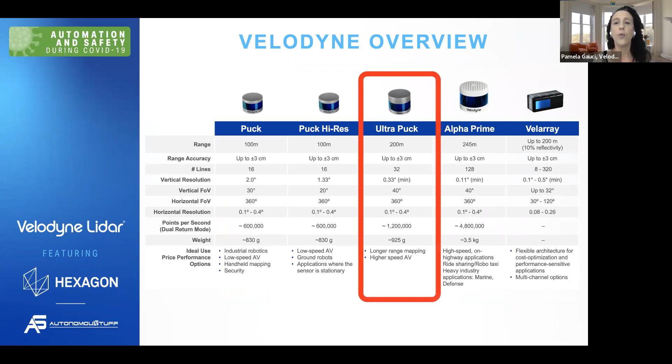Here you see just a few examples of Velodyne Lidar's suite of LiDAR sensors. Our product portfolio provides real-time perception data that enables autonomous driving and advanced safety. Now we're going to focus for a couple of minutes on Velodyne's UltraPuck, one of our surround view sensors designed with the autonomous vehicle in mind. Let's take a closer look at Velodyne's UltraPuck sensor.

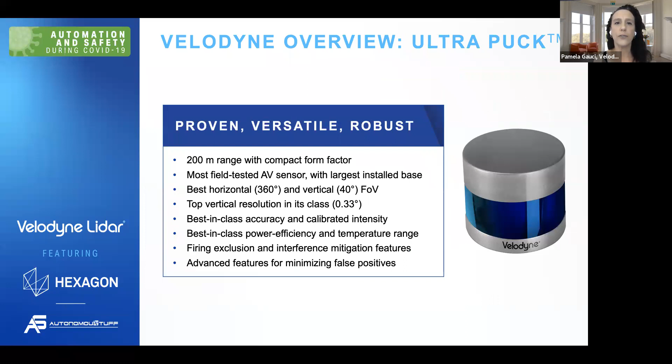The Ultra's 200-meter range and 32 channels provide enhanced resolution to identify objects easily. Velodyne's UltraPuck generates 1.2 million points per second in dual return mode. And since it's built on Velodyne's 558 patent, it provides a full 360-degree environmental view to deliver accurate real-time 3D data. Now let's see what that kind of data looks like.

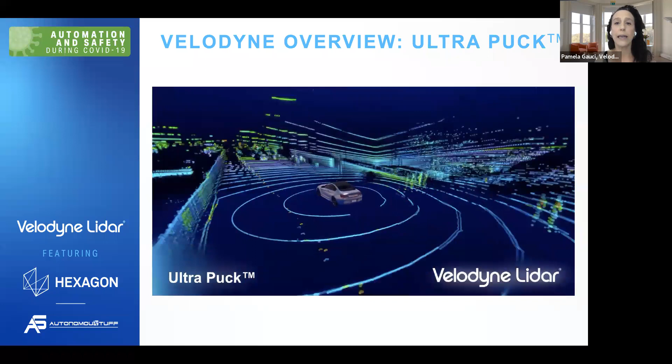In this video clip, you can see the high-density, long-range data captured by Velodyne's UltraPuck on a drive through Nashville, Tennessee. In addition to the features already mentioned, the Ultra offers firing exclusion and interference mitigation features. It also includes advanced features for minimizing false positives, as well as best-in-class power efficiency and temperature range. Add to that pricing and an encapsulated package for handling harsh environmental conditions and weather.

Here you really get a sense for just how detailed of a point cloud the Ultra is capable of producing. And here you can see how the Ultra is actually integrated into one of AutonomouStuff's vehicles. During our interview this morning, Bobby and John will tell us about the work those vehicles are currently doing on the road.

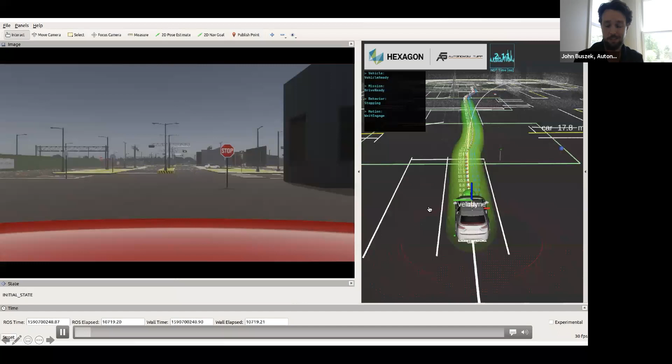Well, I can take that one, Bobby. We're certainly seeing with COVID-19 even more of an emphasis on simulation testing. We have a video that we provided to show a bit of the simulation-based testing we do to make sure the autonomous vehicle platforms we provide our customers come in a state where they're working and meeting their requirements.

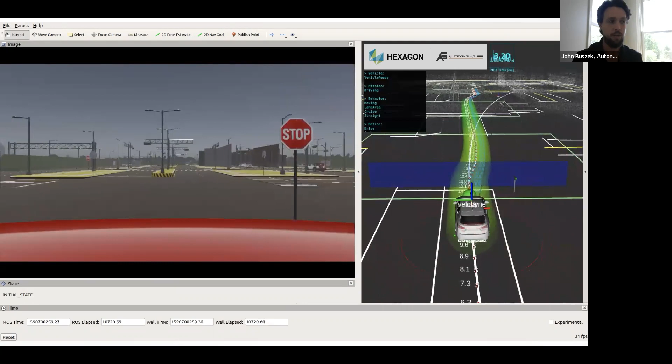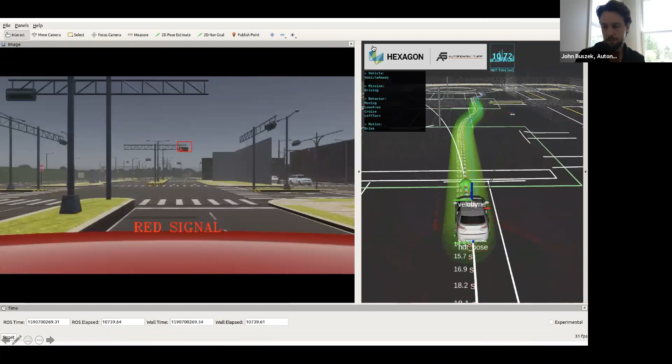Simulation is huge for autonomous driving development even before COVID-19. But when you encounter a situation where suddenly engineers can't go to the office even if they wanted to, or can't get into a development vehicle even if they wanted to, simulation becomes somehow even more important. So simulation is big.

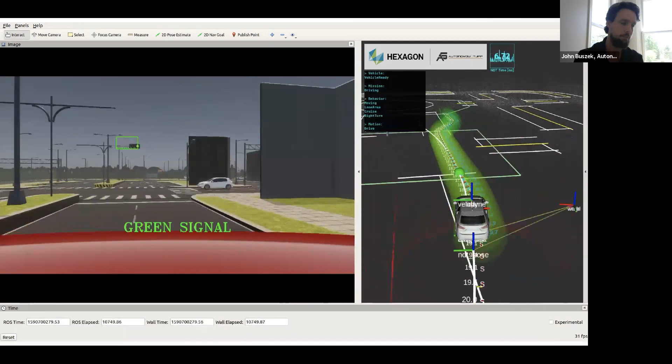And then I think remote access in the vehicle is big too. With COVID-19, you'd want to reduce the amount of people packed tight in these development vehicles for testing.

A lot of times in my career, I've seen an ideal state where you have your safety driver, who's the person only thinking about whether or not the car is doing what it's supposed to do. And if the autonomous vehicle does something that doesn't seem right, they can immediately take over control of the car.

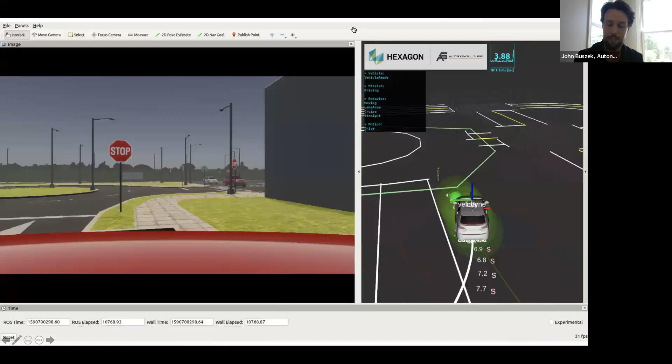And then often you want to have someone in the passenger seat looking at a laptop, watching the performance of the system from a diagnostic and measurement perspective, saying this doesn't look right or this looks good, maybe tuning some knobs, things like that.

As things have become more difficult when it comes to having lots of people in the car, the idea that someone could assist that safety driver and do their laptop duty instead of sitting in the passenger seat, but through some type of remote access—that's another type of workflow we need to get really good at in order to be as effective as we can in the era of COVID-19.

So, John, your work with engineers and customers involves consideration of some really complex automotive safety standards. I want to talk more in depth about safety and testing, but before we do that, can you define for us what safety means when we talk about autonomous vehicles?

Well, at the highest level, it's the idea that any person inside the autonomous vehicle or any person outside the autonomous vehicle would never be put into an unsafe situation because of something that went wrong with the autonomous vehicle, whether it's a malfunction, something just broke, or just a design flaw in how the system was engineered.

So when you think of it that way, you could see the engineers who develop these vehicles have a lot of work to do. So how do you go about developing and testing for standards like ISO 26262, which is a functional safety standard for electrical and electronic systems in production automobiles? How do you tackle that, and what are the challenges?

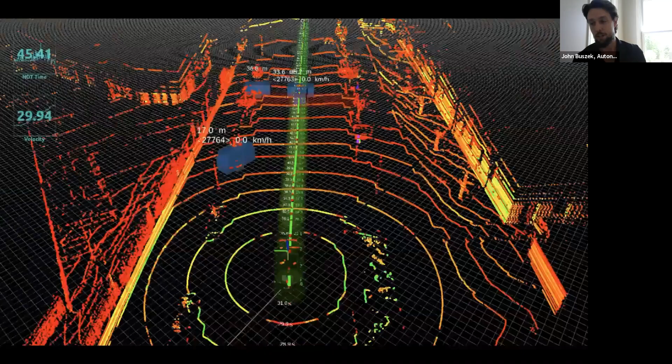And that we would be very skilled in helping our customers use the software and change that full autonomous system, that development platform, into whatever they need it to be. And so we put it to the test in downtown Peoria.

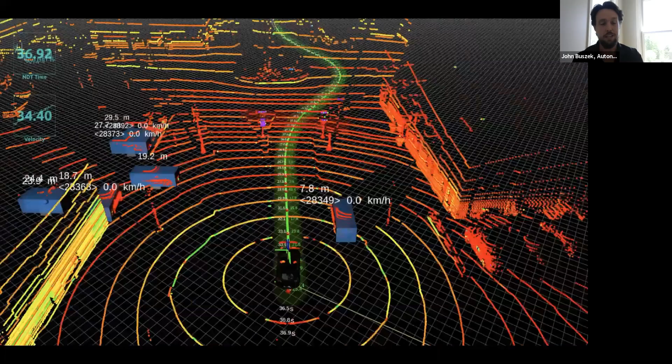And here in this video, you can see Bobby, our safety driver that we were referring to. Here we're testing out one of the different software stacks that we try to enable our customers with for their development—all the challenges you face with city autonomous driving, like where are the obstacles, dynamic path planning, things of that nature. I think here we're looking at a roundabout, another complex scenario in driving in a downtown area. All these are tested and considered.

And certainly if you can deliver a vehicle with this level of capability to an engineering team, you're going to make reaching their goals certainly expedited, right? And give them that boost that they need to develop these autonomous driving systems that, as we said earlier, are very challenging to develop. So they need all the help they can get.

Yeah, and also I'm assuming saving a lot of cost. So all of this testing and research that you guys are doing, I'm assuming you bring that to your customers so they benefit from that. Oh yeah, absolutely. Think of it as, instead of everyone doing some level of testing on their own, one company can do some level of testing and then just distribute that to everyone, right? And bring down the workload of the autonomous driving community as a whole.

Yeah, great. So I want to get to some audience Q&A. I have a couple of final questions, one for each of you. So for Bobby, AutonomouStuff is helping to shape the future of transportation. Can you give us a few highlights from your own vision of what you think that future looks like?

Sure, what a big question. So, when I started my career, the idea of simple urban driving autonomously seemed impossible, right? And what John just talked about, we now can enable someone to get there in a single day—day one, they're driving in the simple urban environment. So that absolutely accelerates the development path towards autonomous driving, and that's been going on for the last decade or something. So I think as technology continues to develop, we're going to start seeing more and more automation on the roads in a variety of different ways.